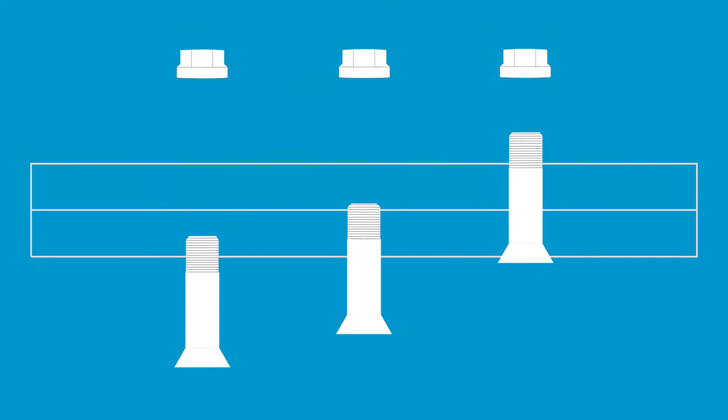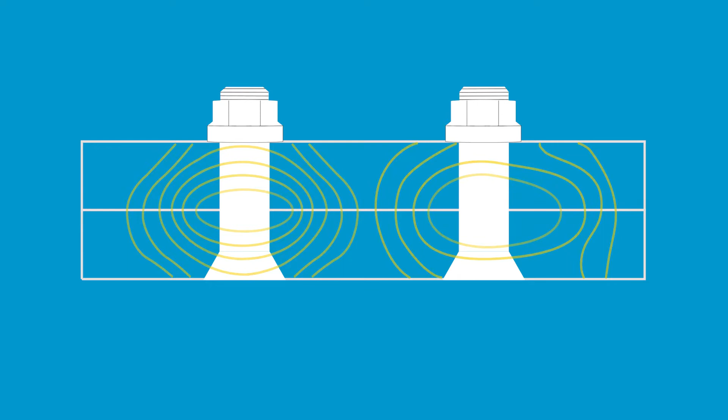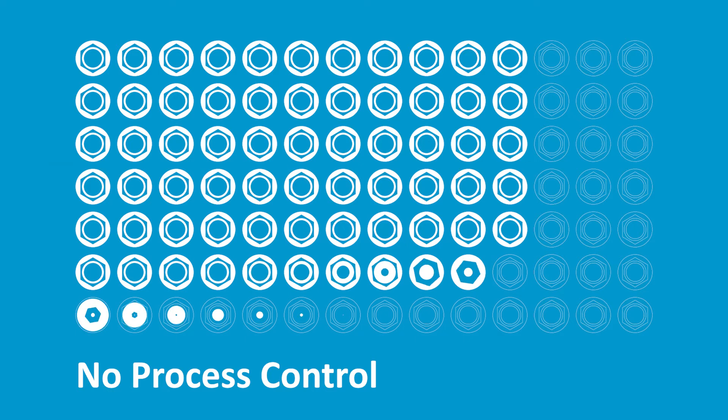Even small deviations in tightening process can have big consequences, both from a safety aspect and from a cost control perspective. Currently, about 75% of tightening tools used in the aerospace industry are basic clutch tools, air or battery powered. This means that assembly errors can easily go unnoticed due to lack of process control.

We have seen examples where one simple application with an O-ring wrongly assembled and tightened without process control resulted in rework cost and productivity losses amounting to 100,000 euros. In another example, a customer experienced slowed down production, quality issues, and need for costly investigations as the result of the use of an incorrect batch of nuts coming from a second supplier. This led to a cost of 70,000 euros.

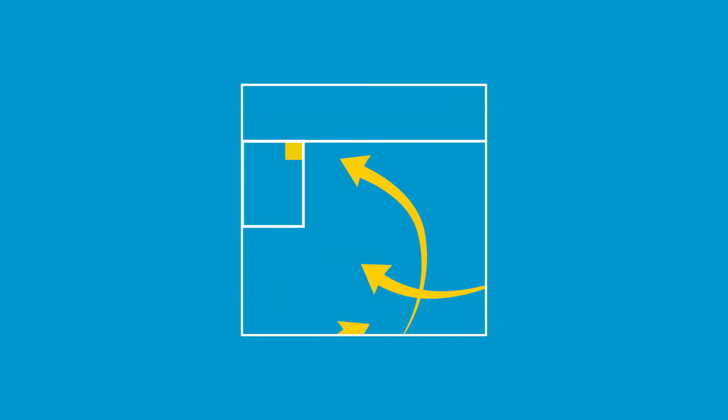Now imagine that cost and extra work for every single mistake that is made. This can create a big impact on profits. The solution for the clutch tools issues is to use advanced transducerized tools, which happens in approximately 25% of all aerospace applications. However, these solutions sometimes come with their own set of challenges. When used in cramped areas, they often can become big and bulky. This makes the operator's job more difficult and ergonomically challenging.

And if a critical tightening needs to be done with full traceability, the tool setup procedure may become a demanding task requiring special skills. In such applications, a stable wireless connection is another important part of the process. And we know many situations in aerospace environment where this simply is not feasible, which means the tool won't be able to work at all. All of these challenges can make your production less efficient and less profitable than it can be.

But what if we tell you that there is a new tool range that can address these challenges and ultimately increase the production efficiency and profitability? And we are proud to introduce the new portfolio of cordless tools called Tensor IxB.

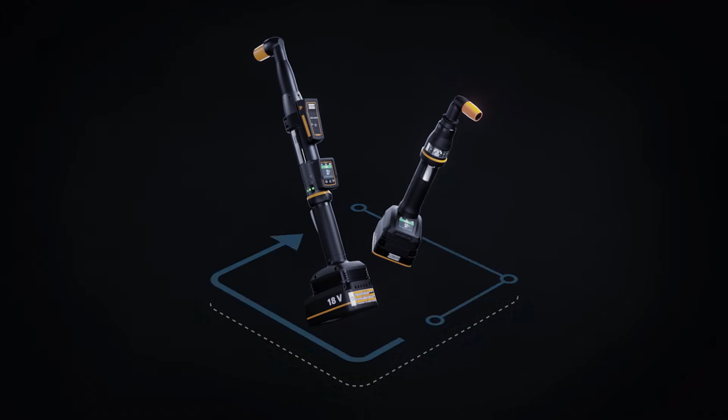The tool family will consist of Tensor ITB, a small ergonomic nut runner that is specifically designed for cramped area applications. Tensor IxB, a true productive cordless nut runner covering torques up to 200 Nm. And both of the tools will share new IxB integrated controller platform. Now we will show you how this new tool concept can be applied in real world and how it can improve your production process.

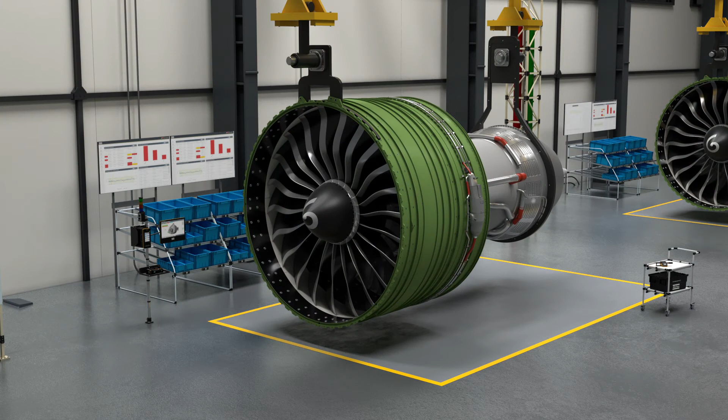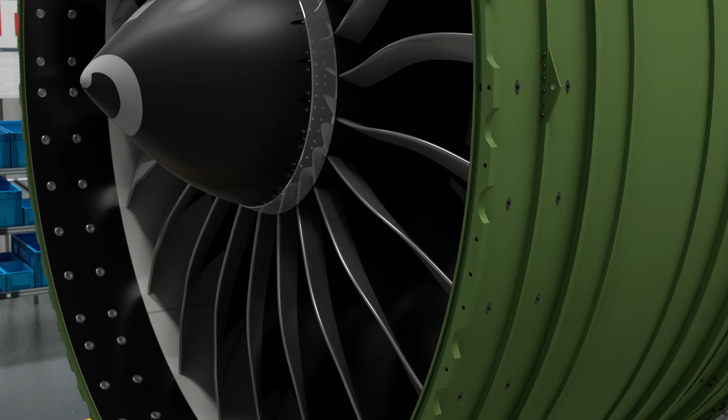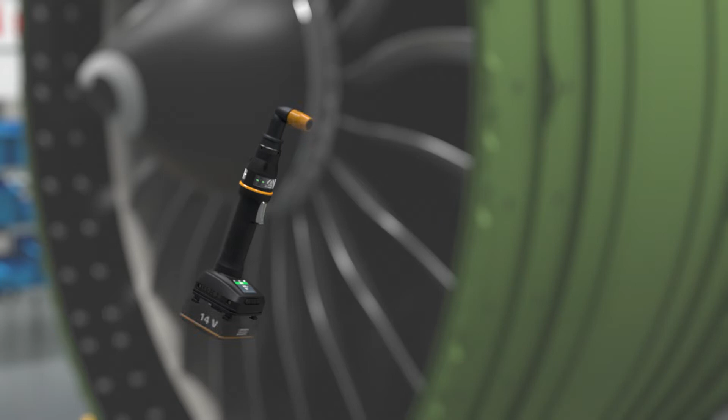Let's go through the whole concept of IxB tools step by step, looking at the example of this final assembly station. It all starts same as always. We need to select the right tool to the right application. And in IxB family, we have a wide selection of different tool models specifically designed to fit the exact specification requirements. Once we've chosen the tool, we also have a variety of options for tool accessories, like batteries and front parts.

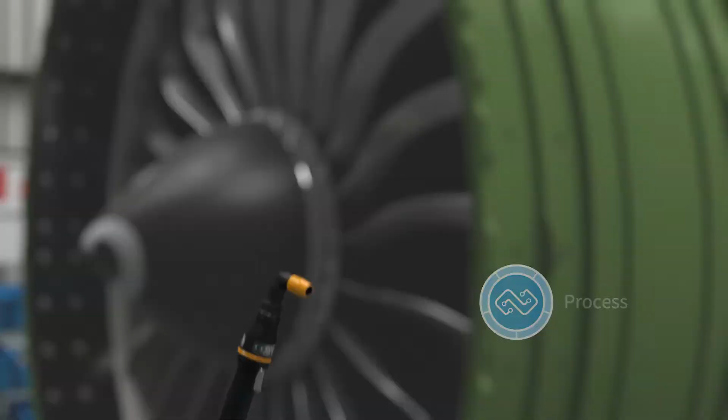Our tool needs to perform certain functions, and here we'll let you decide its functionality level. Select from one of the options that you might be already familiar with if you know our Power Focus controller offering. And the final step for the tool that does critical tightening is to set up the process control and communication to the production system, which traditionally was handled by a physical controller box.

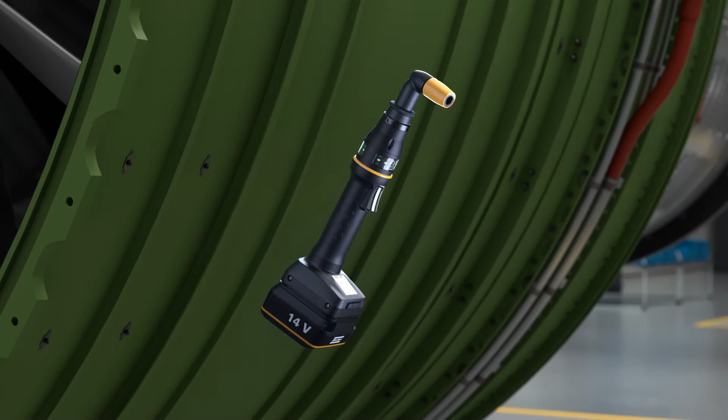And here is where Tensor IxB makes a big difference as our first tool with integrated controller platform. From now on, we have an alternative way to traditional physical controller setup. All you need is to enable the integrated controller function, and your tool is ready to be integrated directly in your production system, fully managed by the integrated controller inside, reducing the hardware footprint on the line and enabling transformation towards a new, smart, flexible way of manufacturing.

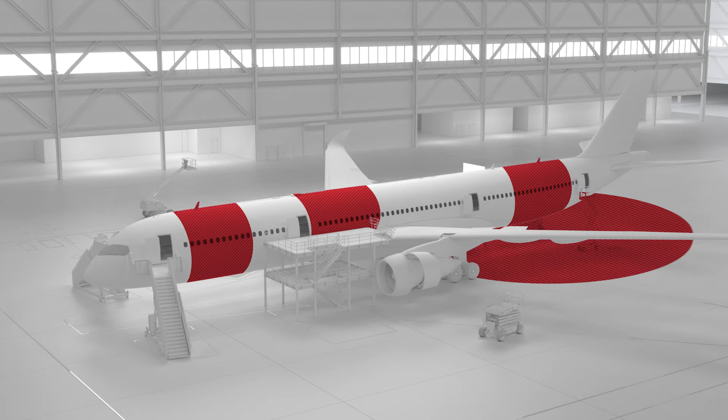Let's look at the goal we call continuous production, describing how Tensor IxB can improve your uptime in challenging connectivity environments. When you look at the aerospace industry, it's a really tricky place for sustainable wireless connection, with lots of closed metal environments and huge facility areas, where today usage of wireless tools with controllers is almost impossible without getting into the radio shadow environment, which leads to many challenges.

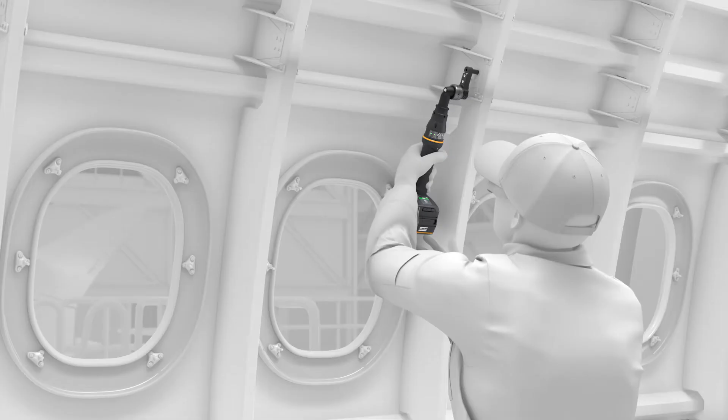But from now on, things are about to change when Tensor IxB can allow us to continue production even when there is no wireless connection. How will it work? Let's look closer. It's all possible with the integrated controller, which is able to autonomously control accessories, manage programs, and buffer result data. And it will send all data to the production system when connection is restored.

On top of it, IxB tools have dual antennas to reduce the risk of bad connection due to obstacles or interference with operator hands. This, together with a buffer battery, will maximize the wireless connectivity uptime. In the IxB tools, we have a new display interface. For Tensor IxB, it comes as an integrated option, which you can see on the picture. On this display, you can see results, select programs, and get a detailed feedback of the tightening status.

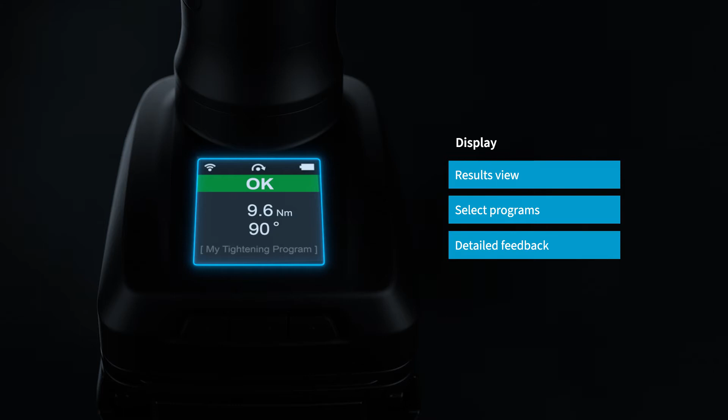And while talking about good wireless connection, you can now see a live Wi-Fi status on the tool display to quickly troubleshoot and solve connection problems. You can also see the live Wi-Fi status on any devices, bigger screens or laptops for deeper investigation.

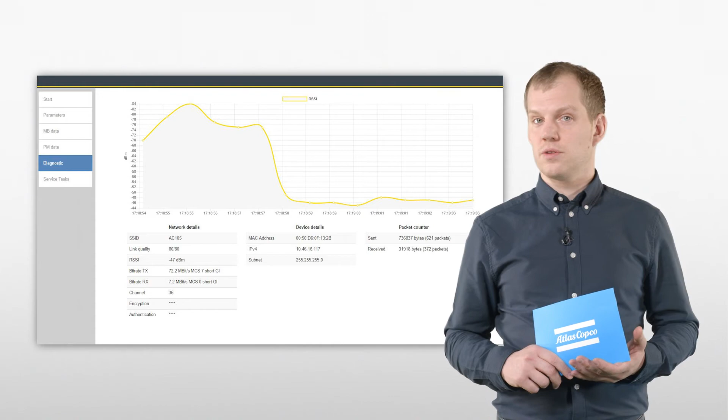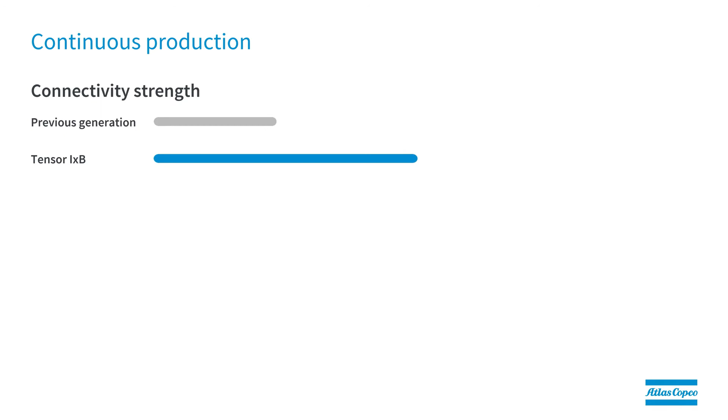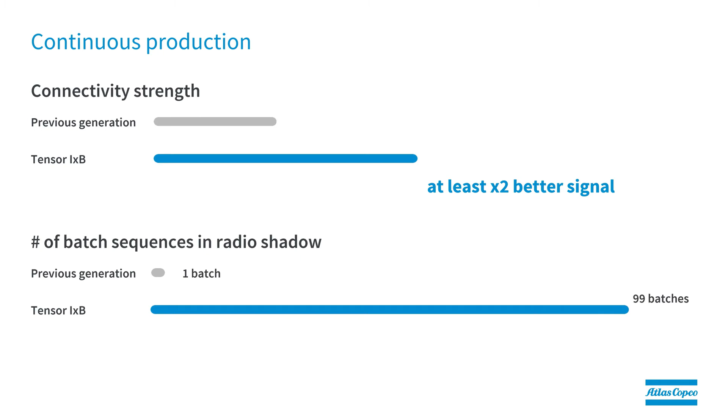If we compare today's battery tools to the new IxB tools, we see a dramatic improvement in wireless connectivity. According to our measurements, Tensor IxB tools show a double improvement in signal strength. And unlike the previous generation of tools, IxB can handle different tightening programs while being in the radio shadow. In summary, Tensor IxB tools help you to keep a seamless production flow in challenging connectivity environments. Let's go back to our production goals.

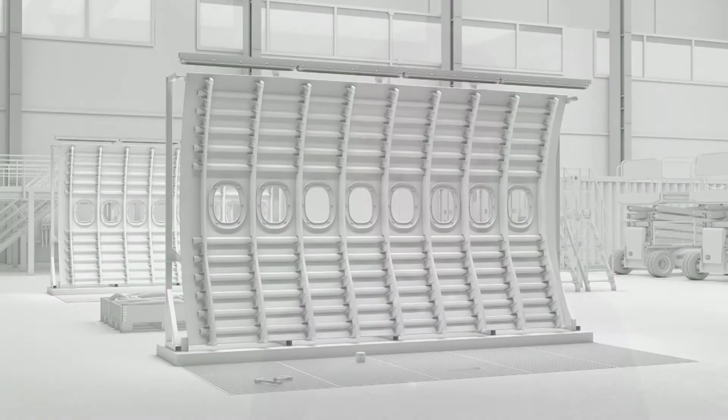Let's look at accessibility and ergonomics. And here we have a big innovation coming with our Tensor IxB range, a compact nutrunner within the IxB tool family. Let's look closer at what it can do on the example of cramped area applications. There are many ergonomically challenged applications in every production process. Some of them are hard to reach and access. For some, the operator movement is restricted. Others create stress and fatigue to the operators due to unnatural working positions.

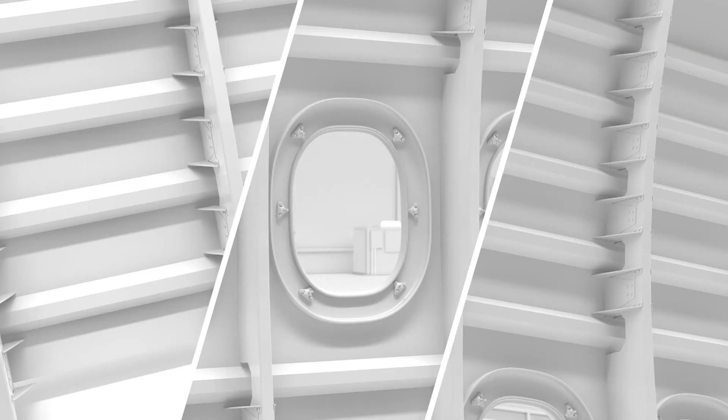And we in Atlas Copco have spent a lot of time researching how we can develop a tool that will make operators' life easier. That's why we're so proud to introduce Tensor IxB, which gives ergonomic access even to the least accessible joints out there. In this example, in the aerospace industry, the tool can be combined with the variety of special attachments required by the production process. And if we look closer at the tool itself, there are several innovations that we want to highlight.

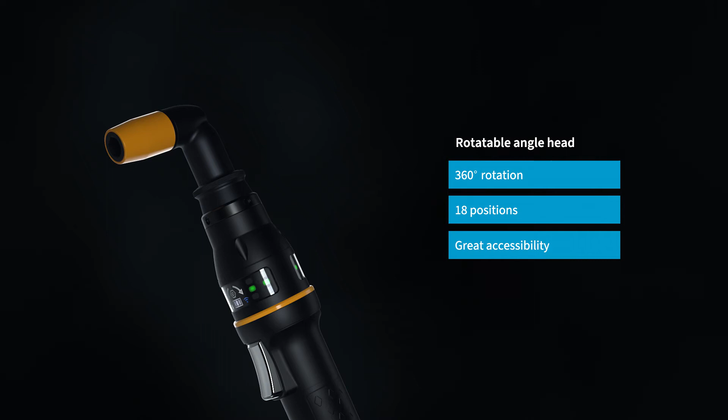First of all, we have a fully rotatable angle head with 18 different positions that the operator is free to change at any time wanted. It gives better access to the joints and creates versatility when one tool can be used for many different applications. Tensor IxB also has a fully rotatable trigger. It can be adjusted at any time or locked if needed in any of its 20 positions. It means that you can adjust the grip position of the tool to make it more suitable for the particular application and experience Tensor IxB superior ergonomics in your own way.

And on top of it, together with the new IxB tool, we are releasing a new 14-volt battery, the smallest battery in the IxB tools family. It's very lightweight and can be used with different tools from both IxB and ITB tool ranges. Now let's compare Tensor IxB to our previous generation of battery tools.

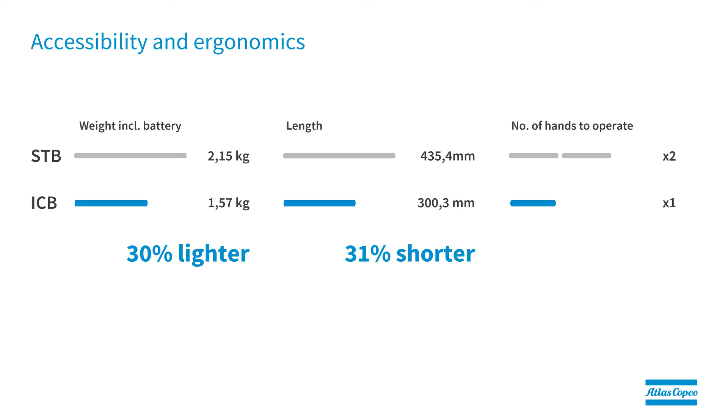You can see that IxB is 30% lighter, 31% shorter, and can be used with only one hand, which gives an operator an option to free up another hand if needed. All making Tensor IxB a perfect choice for cramped area applications.

In summary, Tensor IxB, with its rotating head and trigger, as well as compact and slim design, is a true versatile tool that can be used in different applications at once, making IxB a revolutionary tightening tool for ergonomically challenged applications. Let's go back to our production goals.

When it comes to easiness and user-friendliness of Tensor IxB, we could describe it in words, but instead, let us simply show it to you. First of all, we don't need any special software to access the tool menu. Simply open an internet browser and type in the IP address of the tool connected to our network. Press the Enter key and the Atlas Copco logo will appear, showing that the web interface is opening. And here it is, IxB navigation menu.

Does it look familiar? For those of you who worked with our Power Focus controller before, this will be a no-brainer. Same interface saves time on training and adoption of IxB tools at your factory. Let's do something with our tool. Let's create a new tightening. Click the Tightening tab and press plus to create new. First, we give the tightening program a name. Let's be creative and call it My Tightening Program.

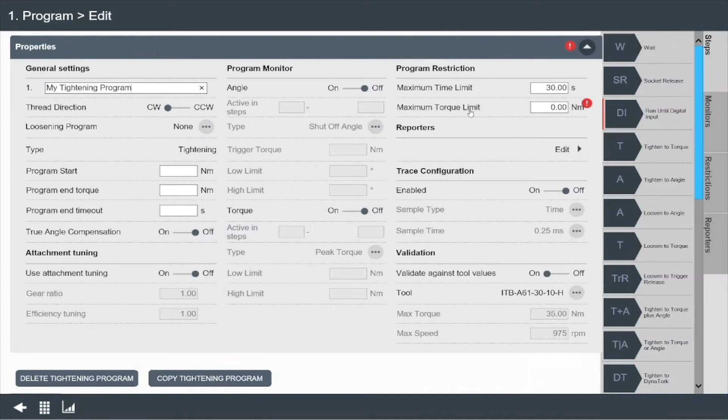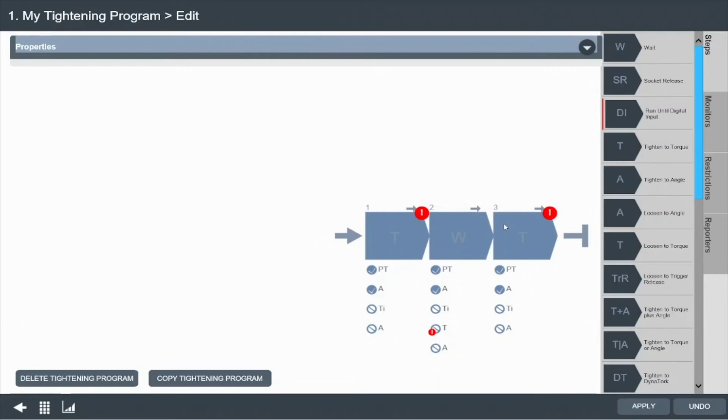And then we can simply drag and drop the tightening steps from the library to create our own strategy. Easy. Let's do a 3-step tightening. For each step, we can set different parameters. First step for rundown process with higher speed. Second step is a pause for relaxation. Third step for lowering the speed and achieving the target torque with high precision.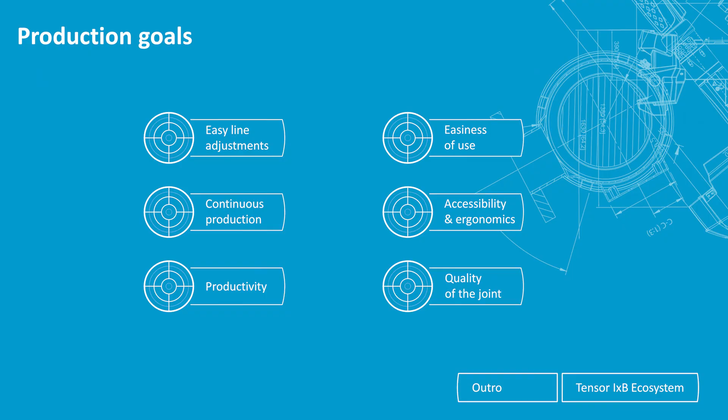In summary, IxB tools have an easy-to-use platform that doesn't require any extra training or special skills to start using. Let's go back to our production goals. Let's take a look at quality of the joint. To achieve high quality of the assembly is on the top priority of our customers' agenda. Let's see how IxB tools can support you in bringing quality to the next level. Let's give you one example.

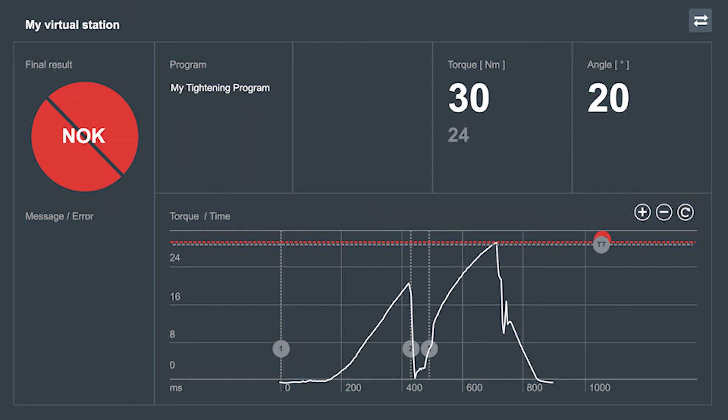Let's say that you're doing a batch of 5 tightenings. 4 of them are okay, but the 5th presents a not okay. There could be different reasons for that. For example, random mistakes. But if the problem repeats itself, we have to investigate. So what do we do? We look at the tightening trace and we see that the final torque is very close to the torque window limit. But it's quite hard to see the details, right? But with IxB, we are now improving the resolution of the trace by 10 times. Let's now have a deeper look. And now we can clearly see that it's a torque overshoot.

And a torque overshoot can be solved in different ways. One of the solutions can be to adjust your tightening program by adding more steps. And now we have up to 16 steps with Tensor IxB, allowing you to create the best tightening program for your applications. But IxB has even more innovations for better quality. Together with our standard 5% tools, we're now introducing a new range of high accuracy 3.5% tools to help you decrease the torque window even more.

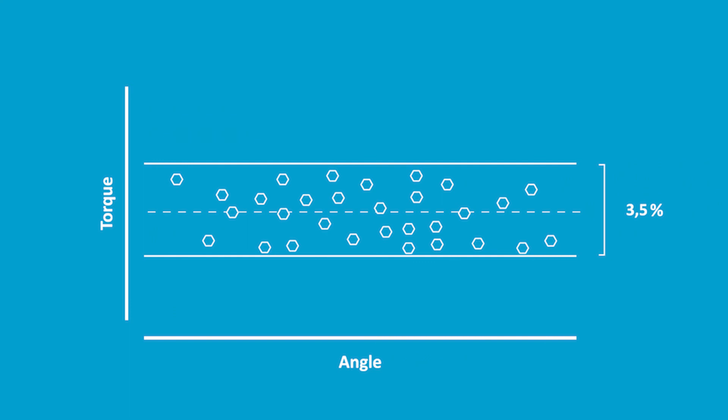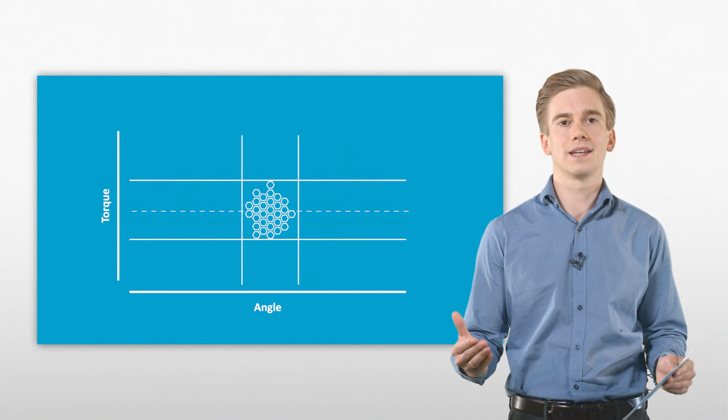And for the first time ever, we are introducing gyroscope with true angle strategy on our battery tools. That helps you to eliminate operator influence on tightening angle. Altogether, it narrows down the torque and angle window, making IxB the most precise cordless tool in our portfolio.

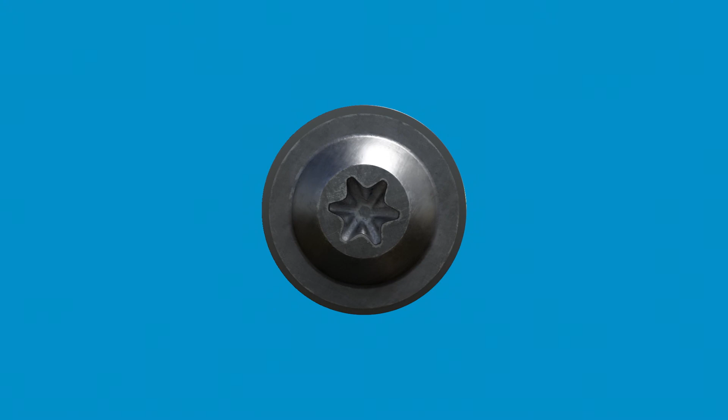Tightening is a fundamental process in the assembly industry. Our aim in Atlas Copco is to help you to achieve the ultimate goal for your production. High quality and safe products for consumers in various types of industries. Products that will drive us towards a better future and create a safer environment for people all around the world. We believe that together we will make it easier to transition to a smarter way for sustainable manufacturing.